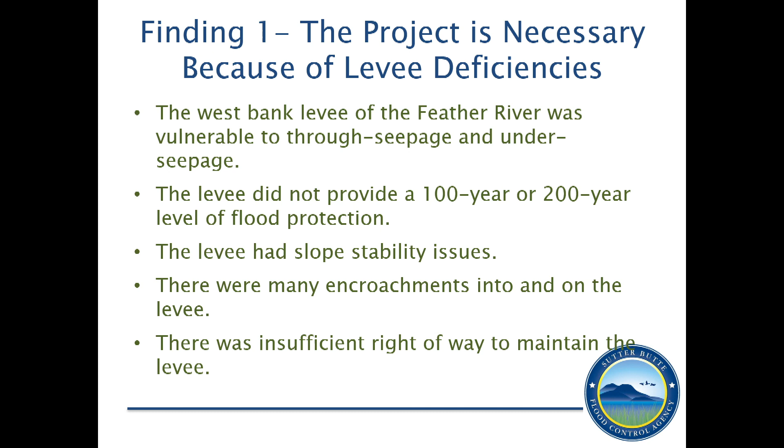Finding 1, that the project is necessary because of levee deficiencies. The West Bank levee of the Feather River was vulnerable to through seepage and under seepage, and it did not provide the required 100-year or 200-year flood protection. They had slope stability issues, there were encroachments, and there was insufficient right-of-way in order to sufficiently maintain and operate the levee system.

And so the project is what was implemented and what has been implemented. The project goals are to achieve 200-year protection for the Yuba City sphere to the north and to achieve 100-year protection of the basin to the south.

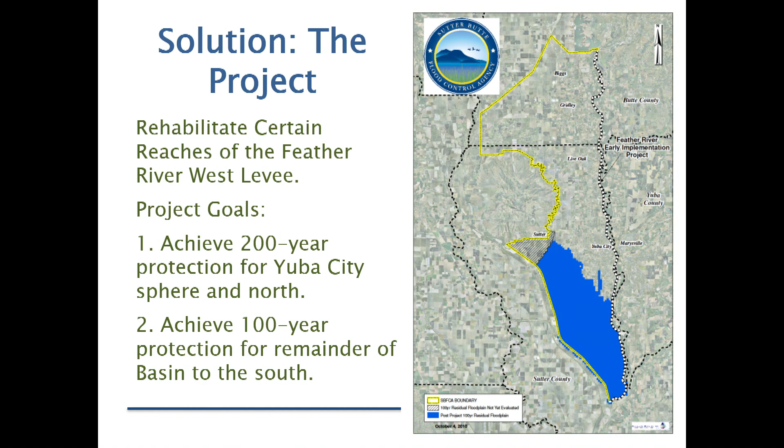And the design features of the project are to mitigate under and through seepage, maintain the existing geometry, and reduce right-of-way. So the primary design feature was cut-off walls to stabilize the levee system.

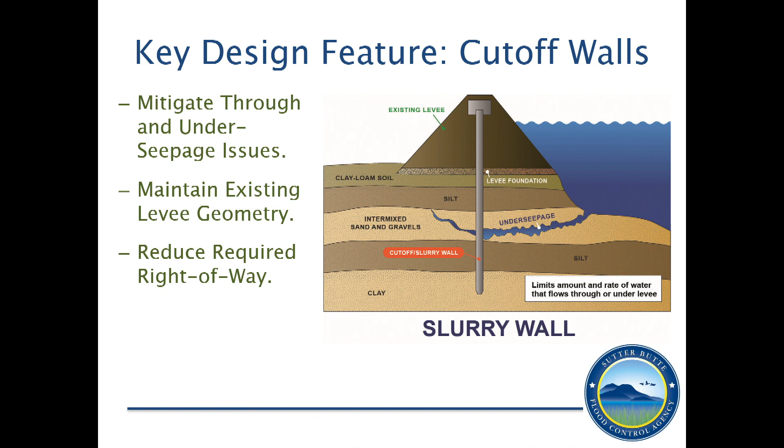Other design features were some seepage berms, and the property we're talking about has a seepage berm—we'll go through that—utility relocations, encroachment removals, and then the requirement to have an operation and maintenance area so that if there are flood fights or if the levee system needs to be improved for whatever reason, there are adequate O&M corridors to do that.

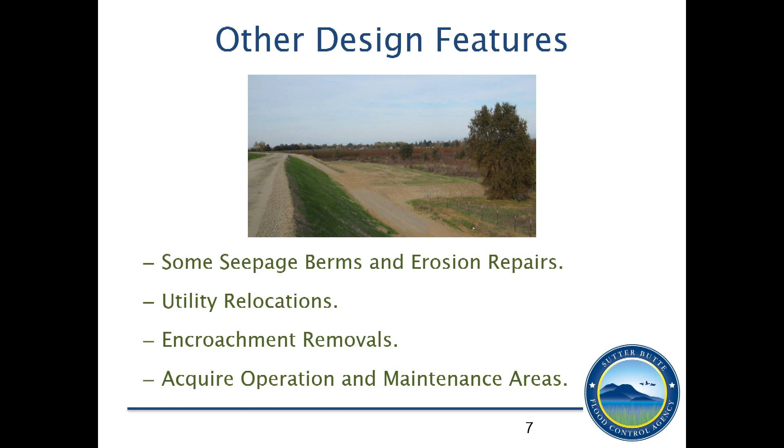Finding number 2 is that the project is planned to provide the greatest public good, least private injury. The project generally plans to acquire the levee footprint plus 30 feet on the land side of the levee toe, and 20 feet on the water side. The 20 feet and 30 feet off the toe is for operation and maintenance corridors. Acquiring the levee and maintenance corridors is necessary to meet the minimum standards of 200-year flood protection, provide adequate room for construction and maintenance, and to prohibit excavations and modifications that would endanger the integrity of the levee.

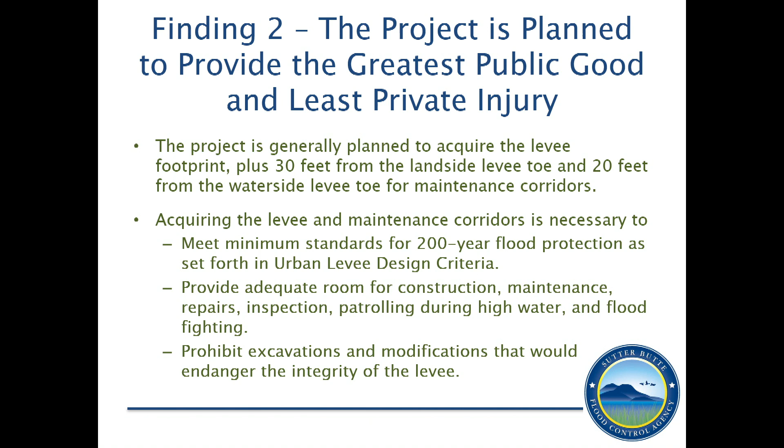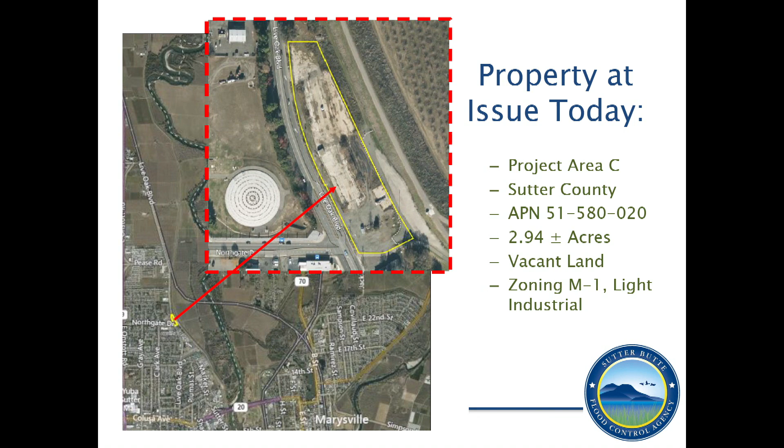The property at issue today is off of Live Oak Boulevard in Yuba City, and it's vacant property. The larger parcel is 2.94 acres. As I indicated, it's vacant land, zoned M1 light industrial.

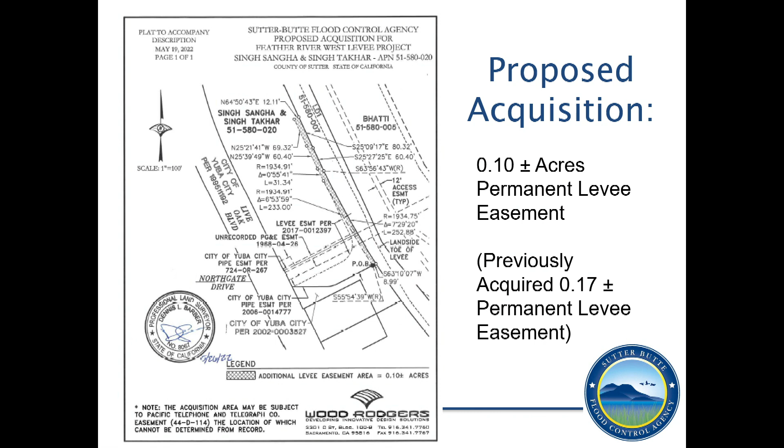The property seeking to be acquired is a very small piece, 0.1 acres. Previously, the agency had acquired 0.17 of permanent levee easement, and the reason we're coming back to the board on this is because there was a gap between what we acquired and the seepage berm. So we're acquiring just a small piece, 0.10 acres, to complete the acquisition on this property, again for operation and maintenance purposes.

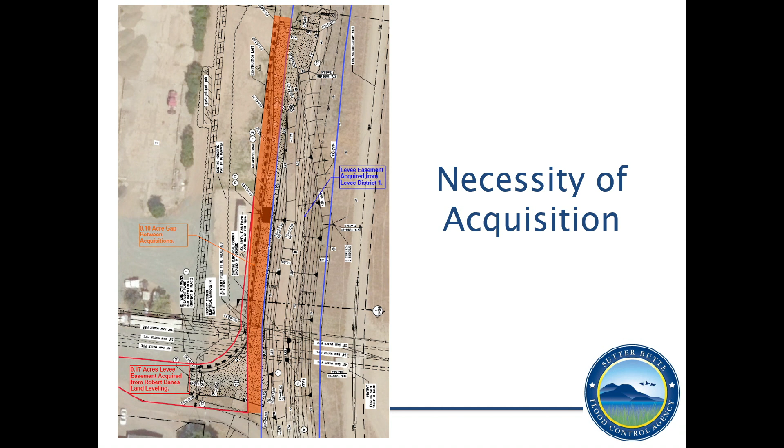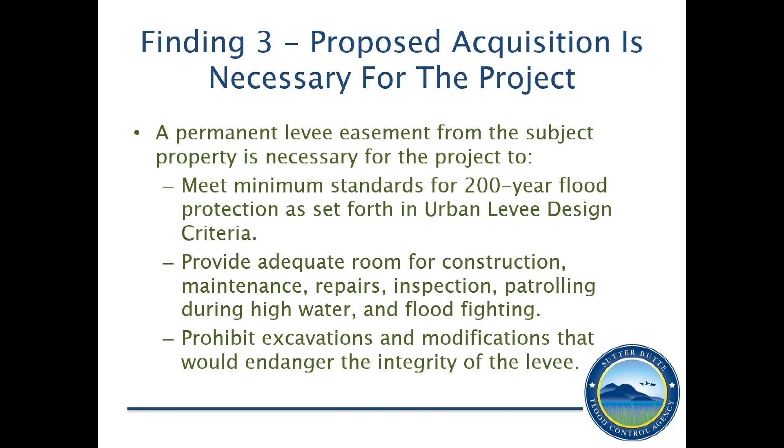The proposed acquisition is necessary for the project because it's a permanent levee easement. Again, it meets the standards for 200-year flood protection as required, set forth in Urban Levee Design Criteria. It provides adequate room for construction and maintenance, basically O&M, and again it prohibits excavations and modifications of the levee.

The last finding is that an offer has been made. The agency has made an offer. We hired Bender Rosenthal, our right-of-way agents. They made an offer of just compensation to the property owner, and we were unable to reach an agreement with the property owner to purchase the property. After several attempts were made to get in touch, we sent the original offer. We followed up several times with phone calls, and then we sent them another notice of this hearing, and to date we have not heard from them.

With the adoption of this resolution of necessity, it allows us to move forward and obtain ownership of the property, and the property owners will obviously be served with whatever legal process is necessary in order to acquire the property. Those are the elements that are required for the resolution of necessity.

Next is questions from the board and comments from the owner of the public, and then a vote on the resolution. Through the chair.

I asked the question when we went through this drill before. That was the Superfund site at one point where we're going to acquire it, I assume, through eminent domain. Are we going to be acquiring the contingent liability because of the contamination on that site, or are you comfortable we're buying a piece of property without the encumbrances of having been a Superfund site?

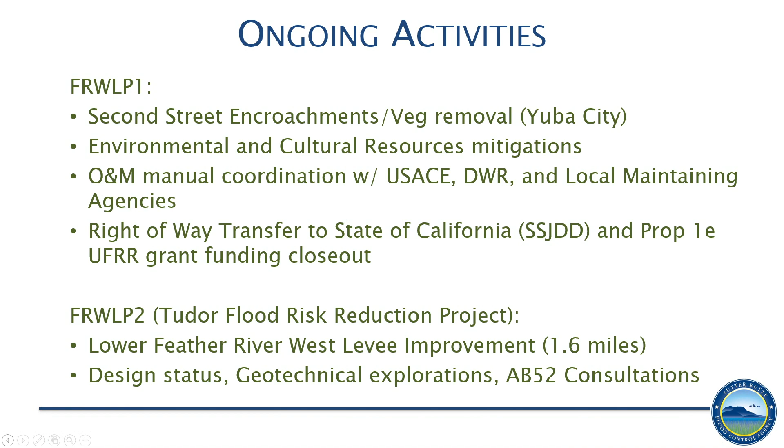This is the 2nd Street project. Basically it's the vegetation removal along the levee slope, the landside levee slope. We're installing new 7-foot tall, no-climb fencing at the toe of the levee. This is at the very southern portion of the project. This did require a lot of cleanup in these areas. Some of these property owners had fencing going up into the levee slope, which we had to remove and replace with new fencing at the toe.

Next slide, please. This is working a little further north. You can see a lot of vegetation remains on the landside properties, but the levee slope itself is very clean and clear of encroachments. And you can see the new fencing going up at the levee toe also.

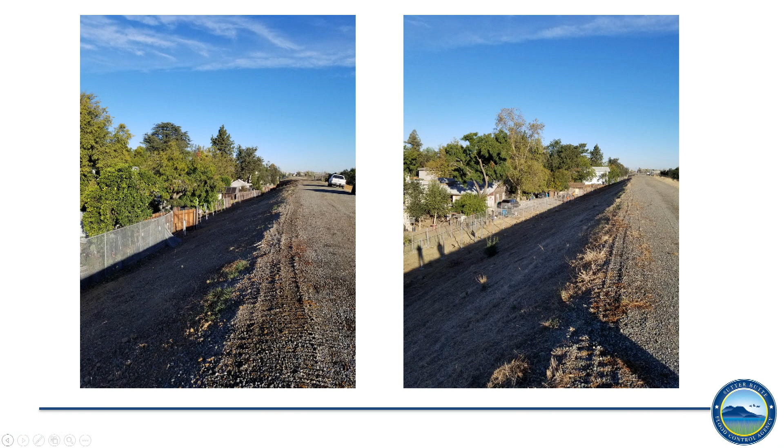Next slide, please — this is the last one, the Roland property. This property had a retaining wall that was into the levee, and we were going to maintain that retaining wall and run it through the permit process. But in working with the property owner, it was difficult to figure out where to put the new fencing, and he didn't want a liability issue with having it at the bottom or at the top of the retaining wall, because if somebody were to climb over and fall, he was concerned about liability.

So we agreed to remove the retaining wall, which was a benefit to our program, and we reconstructed the levee toe. As you can see, we're starting to install the posts for the new fence right at the levee toe there. So this was a win-win situation.

The property owner was happy because we removed an old shed that was into the levee. We took that out along with the retaining wall, and we reimbursed him for a new shed, which you can kind of see in the background on the right. That worked out very well, and the property owner was very pleased, and it made our project that much better from an encroachments compliance standpoint.

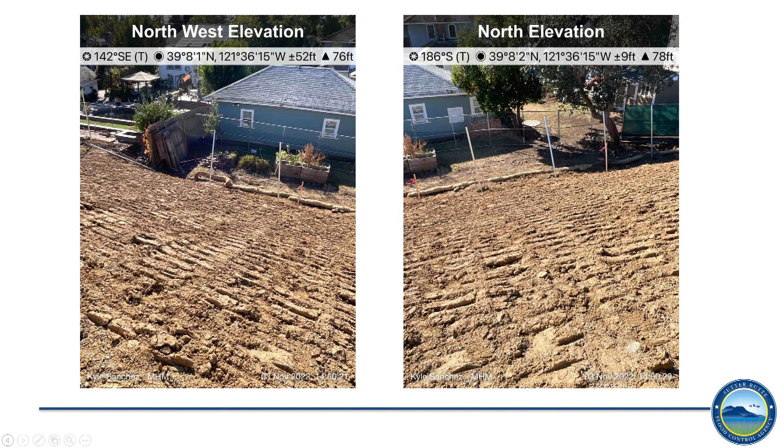Next slide, please. So just wrapping up on Second Street, we're about a week and a half away from finishing up that project. The fencing is the last remaining bit of work, the fence installation. We'll have that completed by probably the end of next week. So we're excited about that.

What exactly is a no-climb fence? The mesh is very tight, so you can't put your foot in there — remember when you used to climb fences as kids, you could stick your foot in there? These are too small, you can't do that. Will the property owners also be able to put slats in too? No, because the whole point is we need visibility. LD1 needs visibility into the property to look for boils during high water events, so we've got to maintain that visibility access.

All right, thank you. Yep.

For this slide, Sutter Bypass East levee repairs, I wanted to let the board know we are very close to getting our $4 million funding agreement through DWR. We just talked to them today, and it's any day now it's coming our way for execution, so we're excited about that.

We issued an RFP for design services. Those proposals were due last Friday. We received two, one from HDR Engineering and one from Wood Rogers, who both work on our program, so individually they proposed. We're reviewing those proposals now. We'll be conducting interviews next Tuesday. Staff will make a selection and take that to the board for a contract award in December.

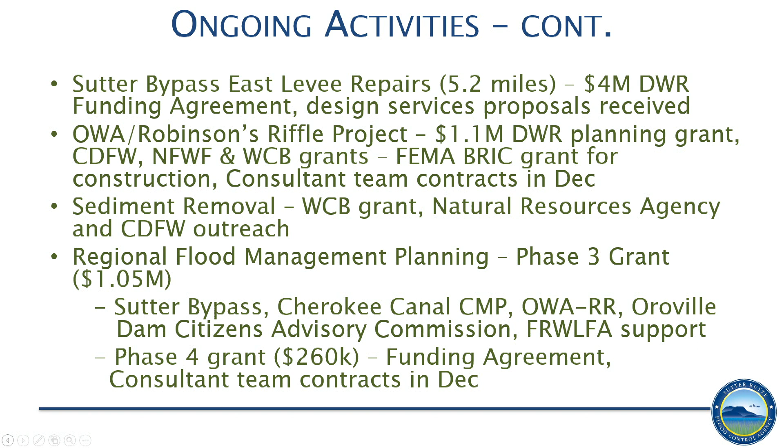On the federal project, the Sutter Basin Flood Risk Management Project through the Army Corps, we're still working closely with the Corps on punch list closeout. The last remaining item is at the Feather Water District facilities, where there are water valves that go up and over the levee. There were leaking vaults that the contractor has made repairs to. We still have a few closeout items to make sure everything's buttoned up properly, so we're working on that.

We're also working on our federal crediting efforts, conducting negotiations with SAFCA for hopefully a sale of our credit that we can't utilize in our basin, but SBFCA would be able to utilize in their basin. So those negotiations are ongoing.

Chris and his team are pulling together all the FEMA remapping work that's needed for Sutter County. We've addressed independent panel of expert comments, and we'll be wrapping up those documents. We're still waiting on the Corps' as-built for the Corps' 5-mile project, the federal Sutter Basin project. We need those to package up with the FEMA package before we can send that in, so that's probably going to be early next year.

We'll be able to finalize that and send it off to FEMA.

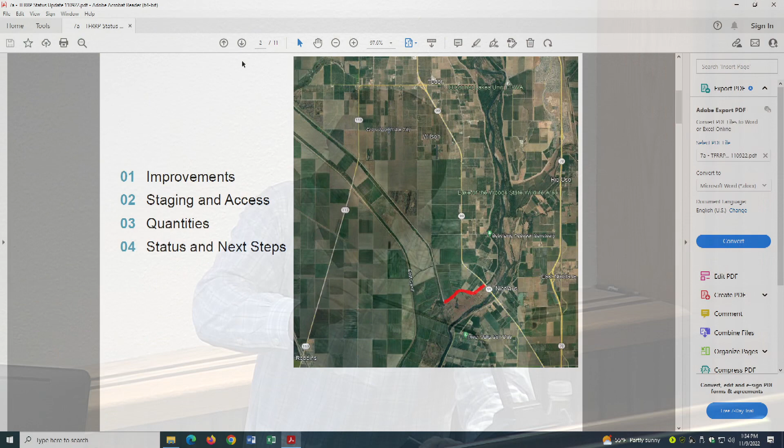Thank you, Michael. Mr. Chairman, members of the board. So the Tudor Flood Risk Reduction Project is our project currently in design for the reach of levee downstream of Highway 99 to the Sutter Bypass confluence. You can see it highlighted in red here. I don't have too much for the presentation today, just a few brief slides to give you a sense of the improvements we're looking at doing in that area, talk a little bit about the staging and access areas, and give you an update on where we are in design and in the environmental and permitting process.

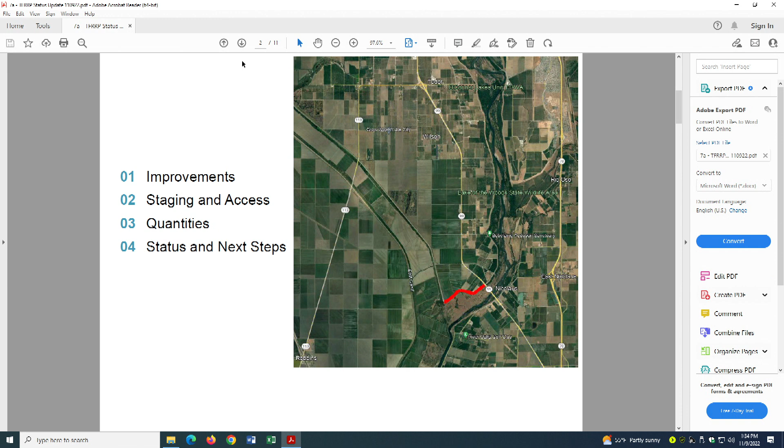This shows a zoomed in photo of that section of levee. It's about 1.6 miles. We are looking solely at cutoff wall improvements. We're not looking at any proposed berms or anything extending out from the landside toe. So everything we're looking at will be completed within the existing footprint of the existing levee.

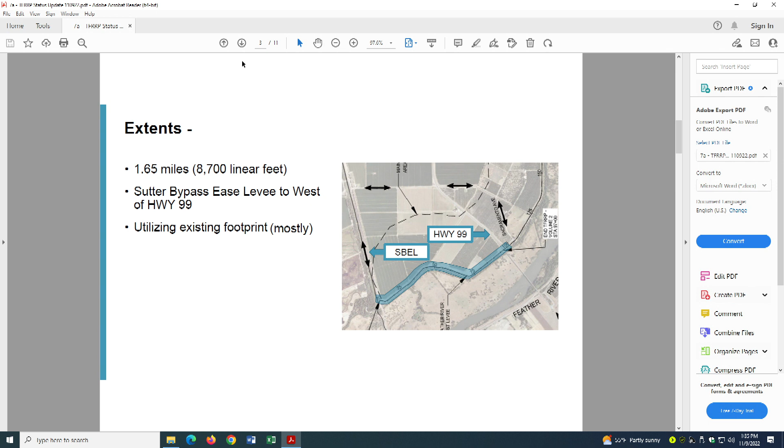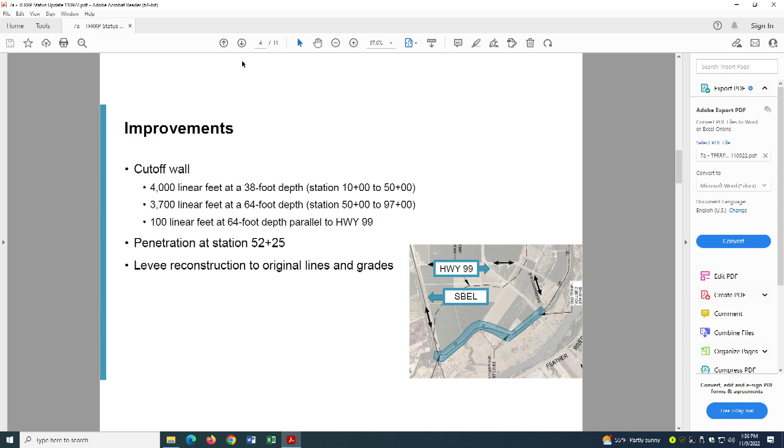The cutoff wall improvements we're currently looking at can basically be broken up into two sections. The first section runs from the confluence to Station 50, running upstream to the first bend in the figure. That section will be a shallow wall ranging in depth from 20 to 40 feet. The section upstream of that, running from Station 50 up to Highway 99, will be a little bit deeper, ranging from 40 to 65 feet. We do not have any geometry deficiencies in this reach, so all the work will be reconstructing the levee back to the original lines and grades.

This gives you a sense of the footprint we're anticipating during construction. In that first section down toward the confluence, we have an existing irrigation and drainage canal near the landside toe. It's not right at the landside toe; there's an access road there. But when we do the work to install the cutoff wall, the contractor will come in and degrade a third of that levee to build his working platform. We plan to place all the spoils in that section on the water side of the levee, mainly to avoid any potential impacts to that canal, and to avoid any potential sloughing or material falling in there during construction.

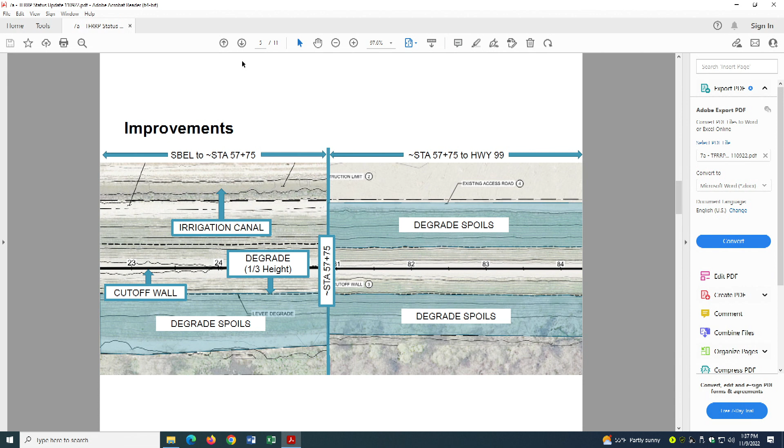As we move upstream away from that irrigation and drainage canal, we'll be spoiling the material in the more typical fashion, on both the water side and the land side. That's the kind of the two figures you're looking at here. This shows a zoomed in section of the area right at Highway 99. In order to address any potential end-around effects or under-seepage coming around the newly installed wall, the design team is looking at extending that wall north at this location for a short segment, about 100 feet.

This is something the design team is still working on, but this was kind of what they shared with us recently in a meeting. So we're still looking at options, but if we do go this route, this would be an area where we would potentially need some additional right-of-way to conduct these improvements.

Chris? So with the second wall, or the levee itself, will there not be any slurry put in to stop the water from coming under? No, that 100-foot section would be a slurry wall. Okay, alright, sorry about that. Thank you. No worries.

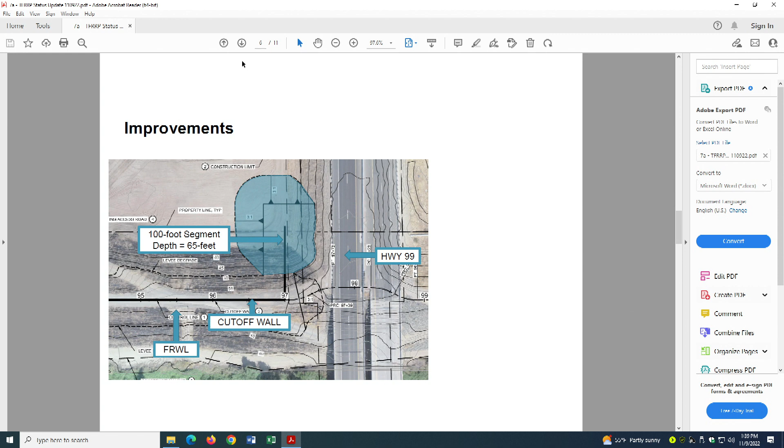This gives you a visual of what that one-third degrade looks like. During construction, they'll degrade the top third, spoil the material on the sides, come in, construct the cutoff wall, and then basically reconstruct the levee.

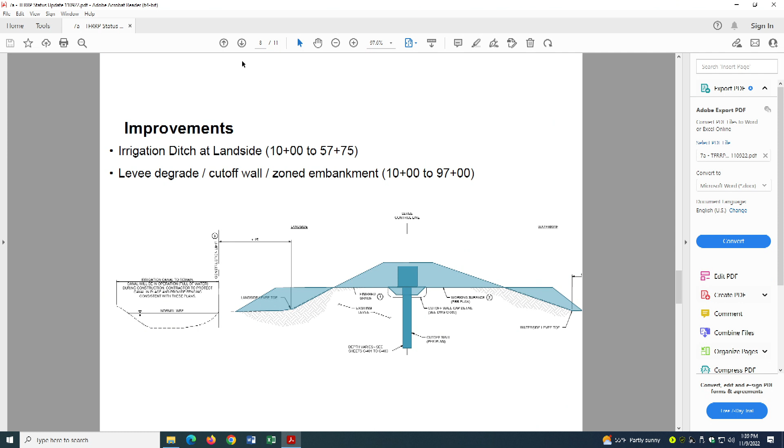This shows some of the staging areas and access that the team has identified for carrying out this work. When we met with them recently, they identified Sacramento Avenue. We brought up that the road has been recently improved by the county, so they are looking at potential options for not utilizing Sacramento Avenue. We also reiterated that we will need to keep the road on top of the east levee of the Sutter Bypass, maintaining access throughout construction. So the staging areas they're currently looking at are two spots: one near the confluence, and one near the intersection of Highway 99 and the levee.

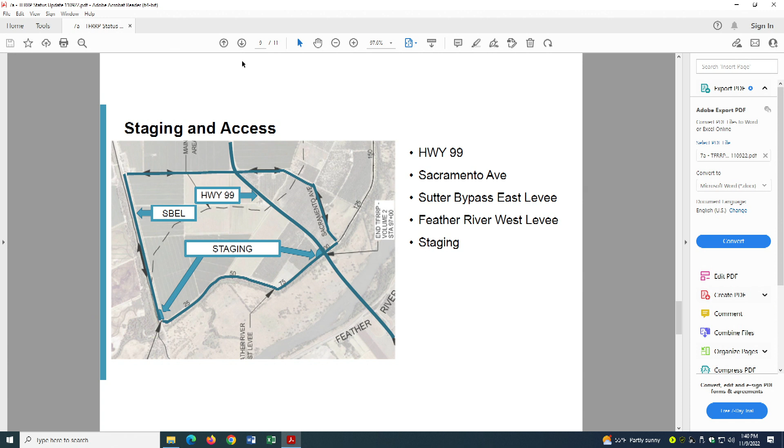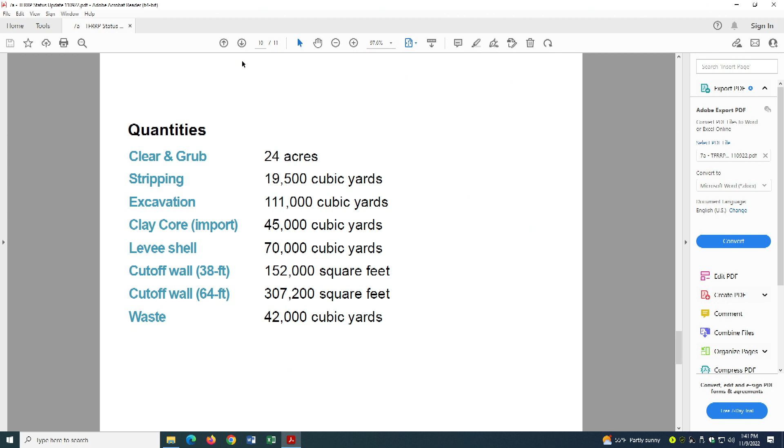We don't have detailed cost estimates from the design team yet for the 65% plans, but just the cutoff wall cost alone, not including excavation or other components, is going to be $5 million alone. For the total cost of the project, we're anticipating between 10 and 15 million, but we'll know more once we get the 65% detailed cost estimate from the design team.

Where we're at now, we're coordinating both the design team and the environmental team. The design team is preparing the project descriptions for our EIR, and finalizing the 65% plans and specs, which we anticipate receiving for internal review at the end of the month. We've also recently reached out to the Flood Protection Board to initiate our pre-application meeting for the 408 process. We'll submit that application to the Corps once we review and approve that 65% package, initiate the 408, and continue working through the environmental process, the 408 process, and all the permitting needed to reach anticipated construction in 2025.